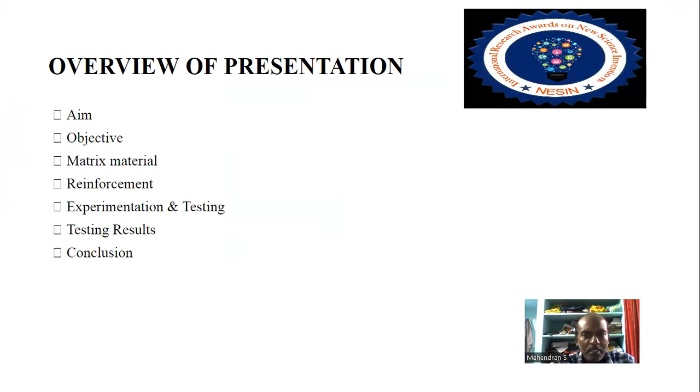Aim: in the production world, alloys are more preferred than monolithic materials. Various alloys of calcium, magnesium, chromium, silicon, and aluminum are applicable in all types of industries. Aluminum 6082 alloy is more preferred than other alloys due to less weight, high strength to weight ratio, and less cost.

In this article, aluminum 6082 alloy is mixed with boron carbide reinforced material by mechanical stirring method. The specimen is tested by hardness and tensile test, and SEM analysis is made to calculate the grain particle distribution.

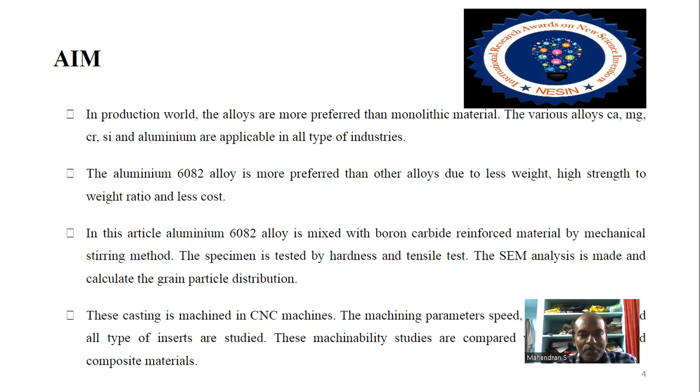This casting is machined in CNC machines. The machining parameters, speed, and all types of inserts are studied. These machinability studies are compared with composite materials.

Next is objectives. The significant objectives of this research work are to synthesize the aluminum metal matrix composites with boron carbide reinforcement particles in different volume fractions through a liquid metallurgy process, and to inspect the microstructural representation of aluminum metal matrix composites.

Using SEM, scanning electron microscope, to evaluate the mechanical properties of hardness and tensile properties, and to analyze machining characteristics of the aluminum metal matrix composites using CNC machine by varying machine parameters: speed, feed, and depth of cut of the composites.

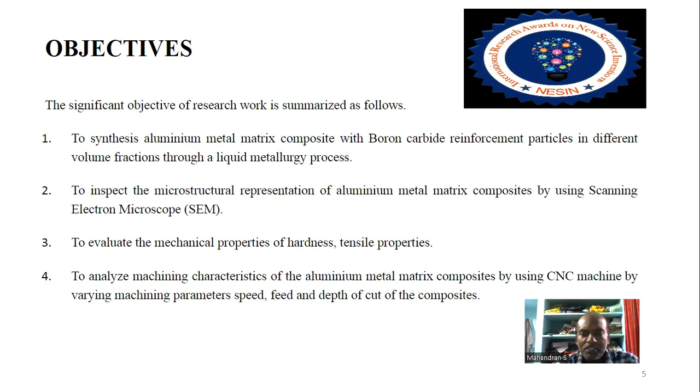Next is metal matrix composites. There are two phases: primary phase and secondary phase. The primary phase forms the matrix, within which the secondary phase is embedded.

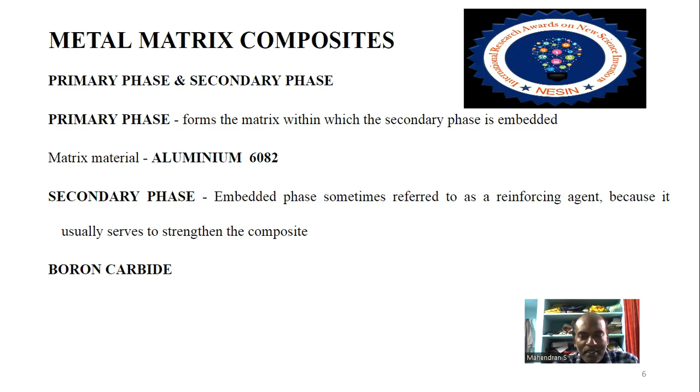The primary phase is aluminum 6082, the starting phase, and the secondary phase is the embedded phase, sometimes referred to as the reinforcement material added agent. Here, the reinforcement material is boron carbide.

Matrix material: aluminum alloy 6082 is a medium strength alloy with excellent corrosion resistance. It has the highest strength of the 6000 series. Alloy 6082 is known as a structural alloy.

Aluminum alloy 6082 is the alloy most commonly used for machining. As a relatively new alloy, the higher strength of aluminum alloy 6082 has seen it replace 6061 in many applications. The addition of a large amount of manganese controls the grain structure, which results in a stronger alloy.

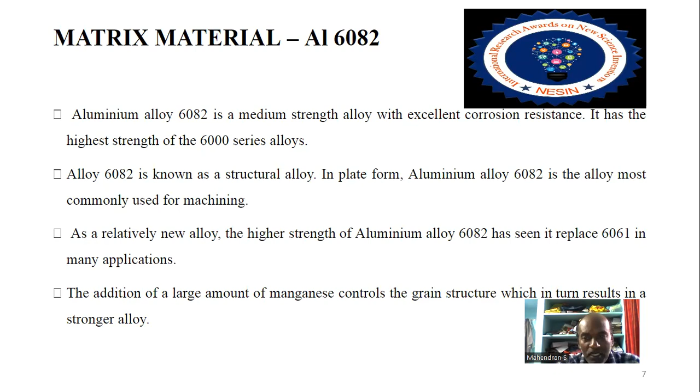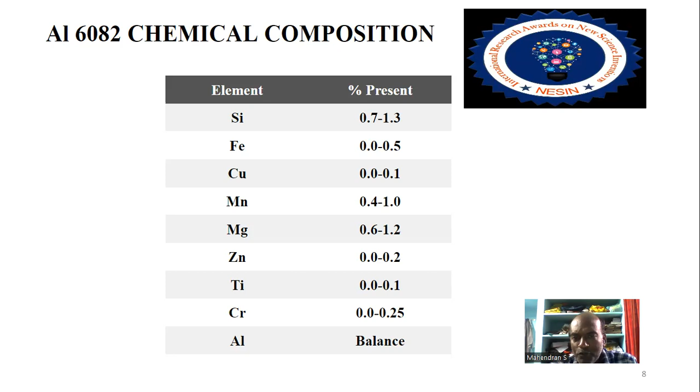This is the aluminum 6082 chemical composition: silicon 0.7 to 1.3%, ferrous 0.0 to 0.5%, copper 0.0 to 0.1%, manganese 0.4 to 1%, magnesium 0.6 to 1.2%, up to chromium 0.0 to 0.25%, with the remainder being aluminum.

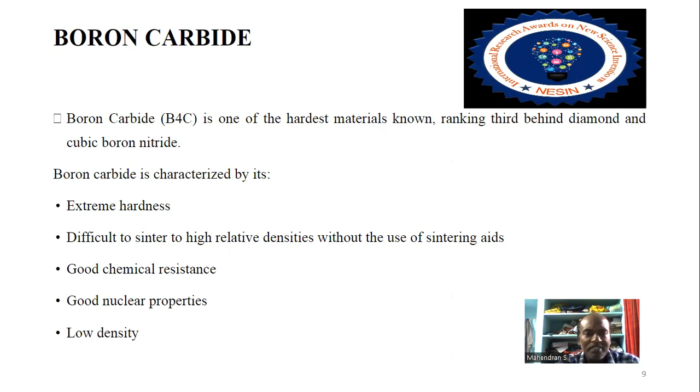Next is boron carbide. Boron carbide B4C is one of the hardest materials known, ranking third behind diamond and cubic boron nitride. Boron carbide is characterized by its extreme hardness, difficulty to sinter to high relative densities without sintering aids, good chemical resistance, good nuclear properties, and low density.

Boron carbide properties: density 2.52 grams per centimeter cubed, melting point 2445 degrees Celsius, hardness 2900 to 3580, fracture toughness 2.9 to 3.7, Young's modulus 450 to 470 gigapascal.

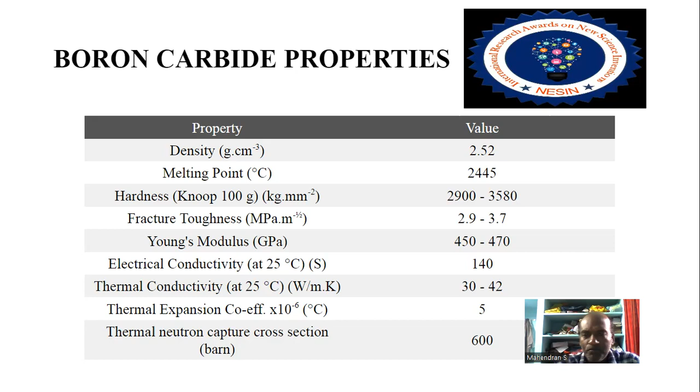Electrical conductivity 140 degree Celsius. Thermal conductivity 30 to 42 Watt per meter Kelvin. Thermal expansion coefficient 5 degrees Celsius, and thermal neutron capture cross section 600 barn. These are the boron carbide properties.

There is an experimentation to fabricate the composites. Predetermined quantities of boron carbide are considered as per the sample composition given below: aluminum 6082 100%, which is the monolithic material.

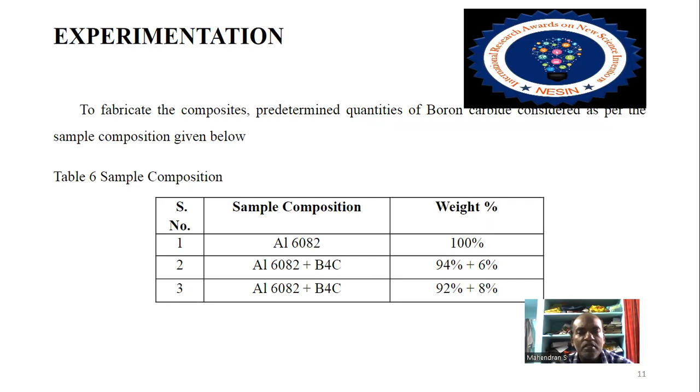Next is aluminum 6082 plus boron carbide: 94% aluminum 6082 and 6% boron carbide. Next is 92% aluminum 6082 and 8% boron carbide.

Stir casting. This is the initial method. The stir casting readings are noted in the table below.

The monolithic aluminum material, aluminum with 0.94 and boron carbide 0.06 ratio, and aluminum with 0.92 and boron carbide with 0.08 are the various weight ratios noted.

This aluminum 6082 material is mixed with boron carbide. Various fractions of boron carbide are mixed. The furnace temperature is noted in the table, along with the preheated temperature, setting time, and stir spindle speed.

There is material one: aluminum 6082 plus boron carbide at 0.94, 0.92 ratios. These are the various fractions added. The furnace temperature is noted as 794, 797, 802, and so on.

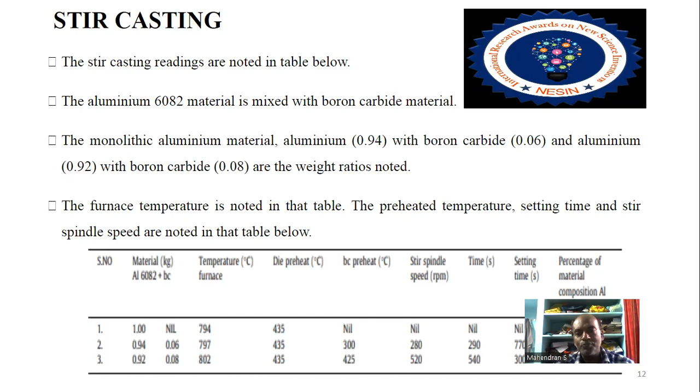This table indicates the die preheat, boron carbide preheat, stir spindle speed, time, setting time, and the percentage of material composition noted.

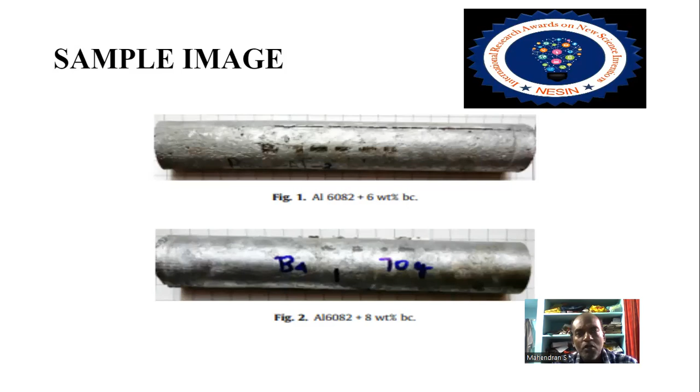Next one is sample image. This is aluminum 6082 plus 6% of boron carbide, and aluminum 6082 plus 8% of boron carbide. These are the two sample images available.

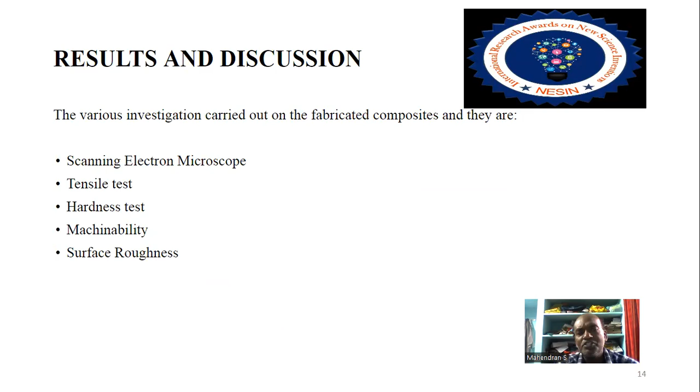Various investigations were carried out on the fabricated composites: scanning electron microscope, tensile test, hardness test, machinability, and surface roughness were calculated. These are images of aluminum 6082 with 6 weight percentage of boron carbide and 8 weight percentage of boron carbide.

The boron carbide particles are evenly distributed in some images. The stir casting method is more suited for boron carbide reinforced materials. The aluminum alloy mixed with boron carbide has high risk due to low wettability and small agglomeration. These factors produce non-uniform distribution and poor mechanical properties.

Some images indicate the primary alpha aluminum dendrites and eutectic silicon with boron carbide particles are separated at interdendritic regions. Stirring before and after introducing reinforced particles results in the breaking of dendrite-shaped structure into equiaxed form. The same photograph indicates gradual distribution of reinforced material, and boron carbide has a greater number of grains.

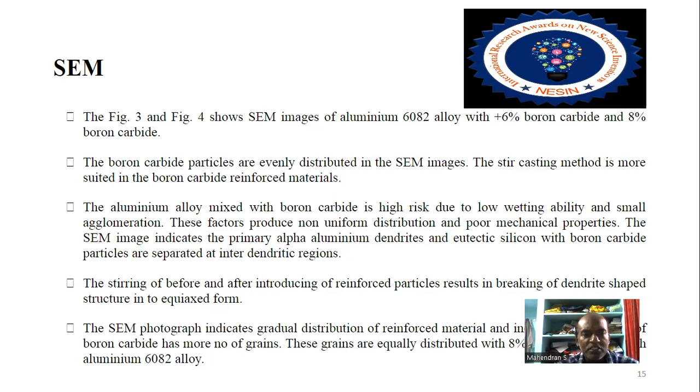These grains are equally distributed with 8% aluminum 6082 alloy. These are the same images noted.

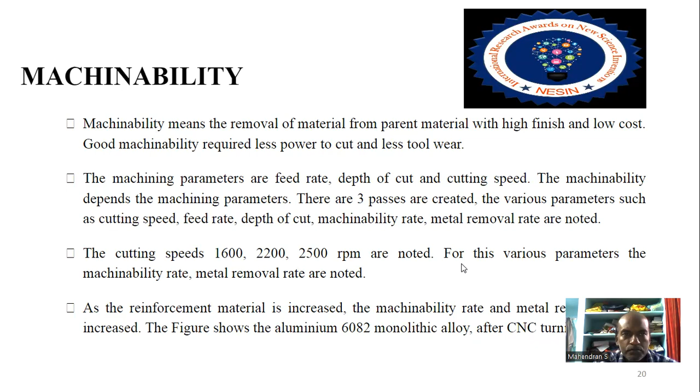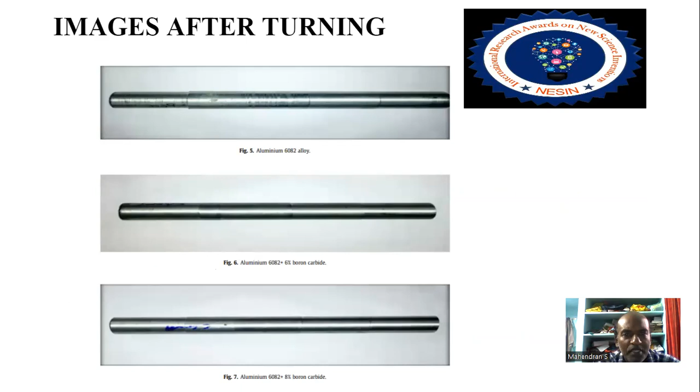The figure shows the aluminum 6082 monolithic alloy after CNC turning. These are the images after turning, for aluminum 6082 alloy, aluminum 6082 plus 6% boron carbide, and aluminum 6082 plus 8% boron carbide, with various machining parameters.

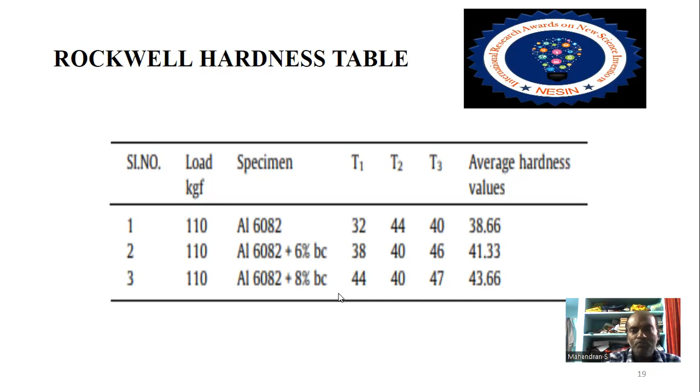The average hardness values increased from 38.66 to 43.66. So mixing the reinforcement material, boron carbide, with the monolithic aluminum material, this composite material, aluminum 6082 plus 8% boron carbide, in this third row, shows better hardness values. This is the first conclusion point.

Next, whenever the hardness value is increased, automatically the tensile values are increased from monolithic material to composite material alloy.

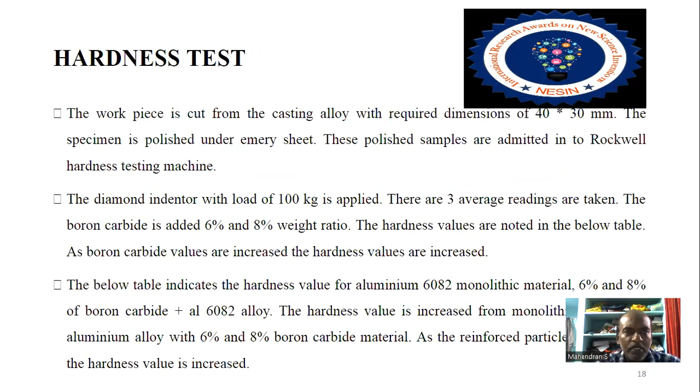Let's move to the tensile test. These are the same three specimens: aluminum monolithic material, aluminum 6082; aluminum 6082 plus 6 weight percentage boron carbide; and aluminum 6082 plus 8 weight percentage boron carbide.

Automatically the ultimate tensile values increased from 121.68 megapascal to 174.90 megapascal. The ultimate tensile strength values are increased. This is the second conclusion point.

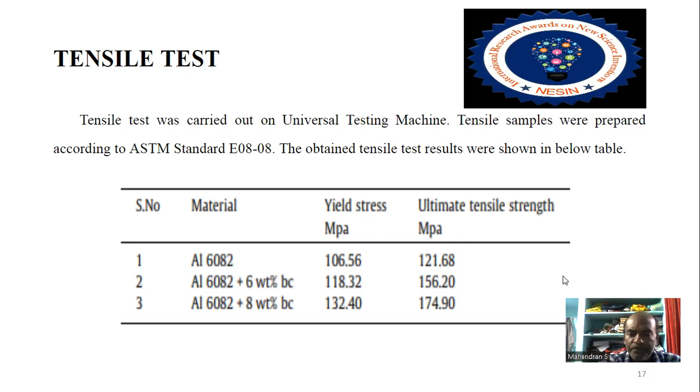Next is the SEM analysis. The SEM analysis was conducted for monolithic and boron carbide material. The boron carbide materials are evenly distributed in the alloy.

There is 8% weight ratio of boron carbide plus aluminum composite material. The boron carbide materials are evenly distributed in that alloy. Let's look at the SEM analysis diagram.

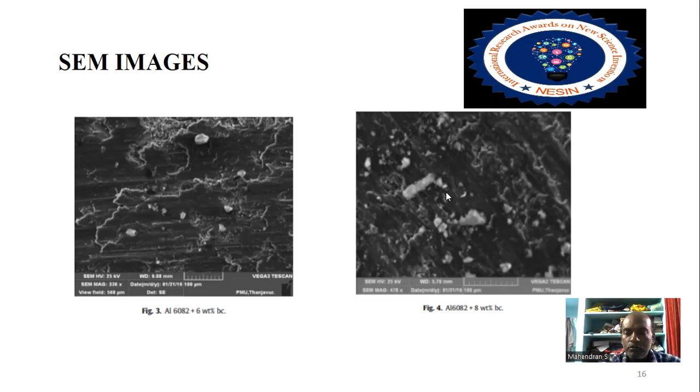This is aluminum 6082 plus 8% boron carbide, evenly distributed. This is the better specimen and better composite material, aluminum 6082 plus 8% boron carbide. This is the final conclusion point from the SEM images.

Next, the machining characteristics are studied. Various parameters such as speed, feed, and depth of cut are noted. The machinability rate and metal removal rate increased from monolithic material to composite material.

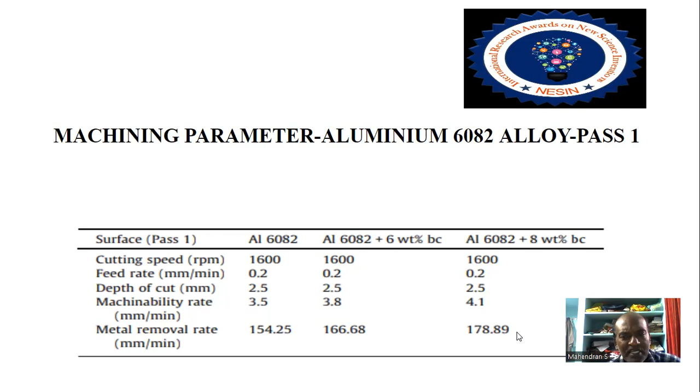This is set one. Machinability rate also increased from aluminum 6082 to aluminum 6082 plus 8% boron carbide, 3.5 to 4.1 millimeter per minute. Metal removal rate also increased, 154.25 to 178.89 millimeter per minute.

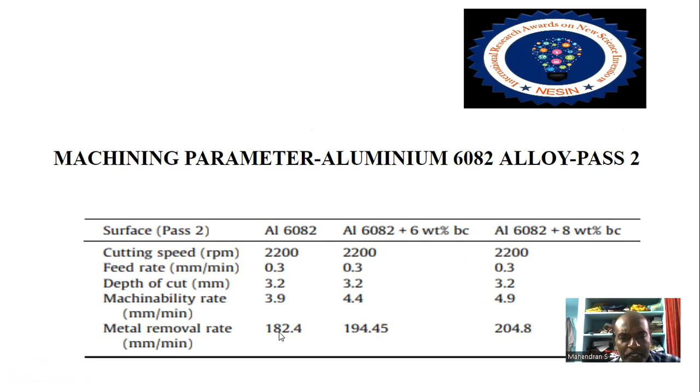Also, cutting speed and feed rate are increased. Machinability rate also increased, 3.9 to 4.9, and metal removal rate from 182.4 to 204.8 millimeter per minute.

Next, another set: machinability rate increased from 5.1 to 6.7 millimeter per minute. Metal removal rate increased from 205.4 to 232.4 millimeter per minute. These are the various machinability rates. The metal removal rate also increased, as we already noted.

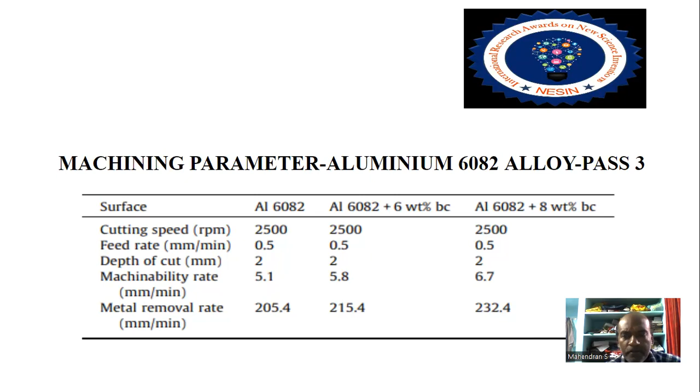These are the final conclusions. The final conclusion says, compared to monolithic material, this composite material, especially boron carbide composite material, has more hardness value, more tensile value, very good SEM images with even distribution, and very good machinability rate under such parameters. Feed rate and machinability rate are also improved.

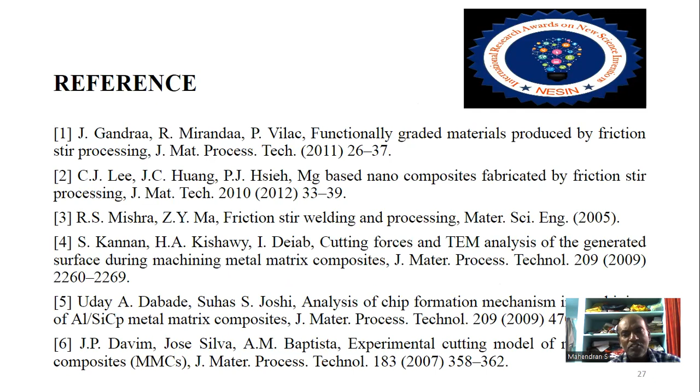So this aluminum 6082 plus 8% boron carbide composite alloy is a better material compared to the monolithic material.

This is applicable in all types of industries, especially such kind of armed forces industries. These are the main applications. So we concluded that aluminum 6082 plus 8% boron carbide composite material is a very good, better composite material.

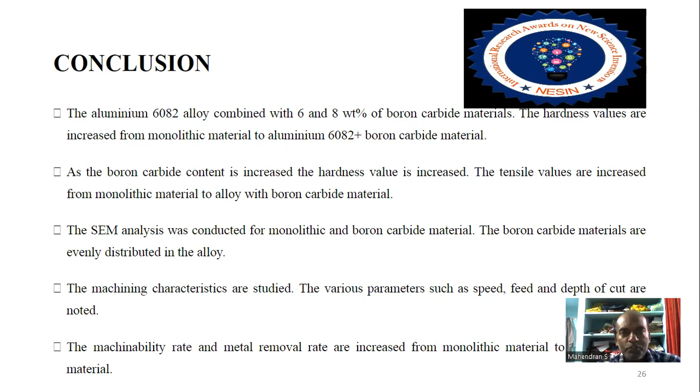These are the final references we have noted.